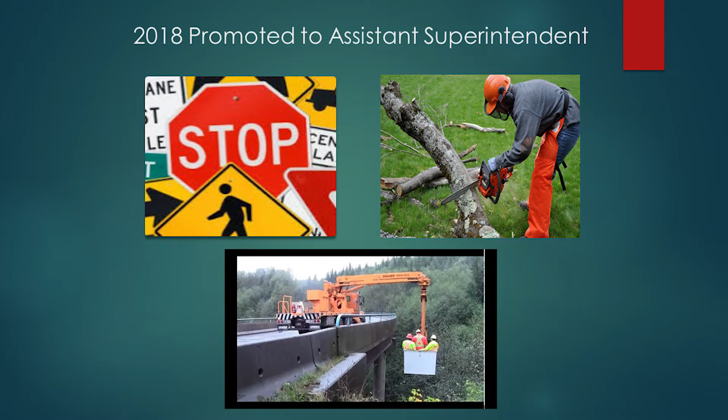We often talk about change, and sometimes when we talk about change, it really just boils down to, are you willing to take a chance? So for us and for our story, here's how this change/chance happened. In 2018, I was promoted to the assistant superintendent, and what that entailed for me is I received a sign crew, a brush crew, and a bridge crew. The sign and brush crew are tales for another time that I'll talk to you about later if you want to talk to me.

I come from a background of communications and theater, and believe you me, if you know me, you'll learn about my theater background a lot. My question was, I'm not an engineer, nor do I play one on TV. So I didn't really know anything about bridges. I was like, I don't know nothing about no stinking bridges.

Right? So my story started with, how do I learn about bridges? How do I learn about these assets that I have received? Well, I'm going to tell you that if you don't already know, you have these lovely partners with you, and they're called LTAP, those local technical assistance programs, and those people are wonderful. Our LTAP guy is actually here today.

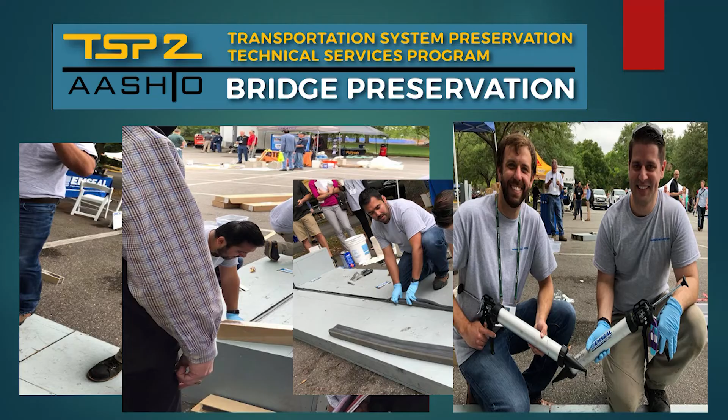He's going to moderate this next session, Pat Connor, and I think Greg had spoken about him a little bit as well. But I told Pat about my lovely dilemma, if you will, and he said, well Mel, I got a solution for you. Here's what we're going to do. He said, I'm going to take you, and how would you like to go to Florida? And I said, yes, please. So he took me down to Florida on a scholarship, which we have another local here that's on a scholarship as well.

So Pat is really willing to help us out, and he said, I'm going to take you to this program, and I'm going to let you learn about bridges, let you learn about some of those things. And the great thing about this is that you get to see it, touch it, feel it. And I'm one of those kind of people. I like to see it, touch it, and feel it.

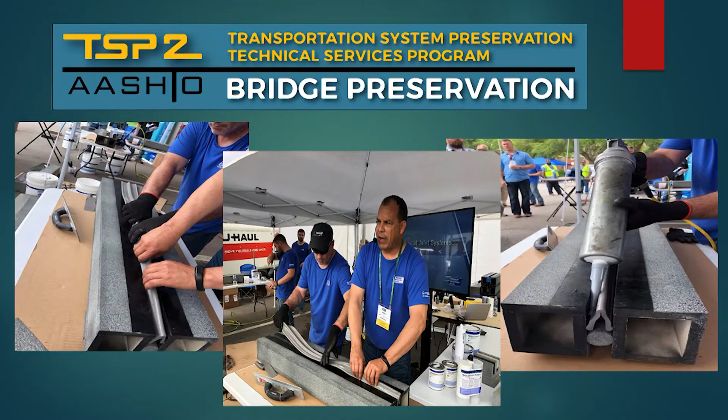So I got this great day on the second day, which was actually Tuesday at that time, and they take you out in the parking lot and they set up all of these demos, right? And they show you that, hey, this is this. And I loved that because I got to see and I got to touch and I got to feel.

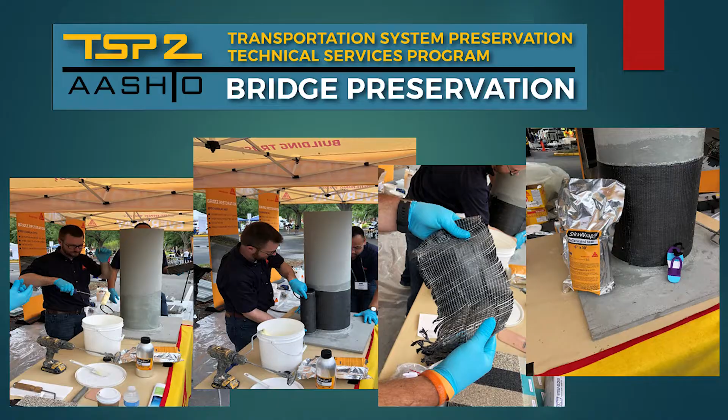Some things that honestly, as a local and as a person that doesn't come from that type of a background, I got some terminology under my belt. I got some things that I wouldn't have had otherwise.

People that drive on our roads, it's funny because we talked about this in one of the other presentations. They look at the aesthetics, right? They don't understand that there are things going on underneath those bridges, above those bridges, whether it's just a smooth or a bumpy ride.

So I was able to do that, and as you can see, these are just some of the slides, and I was just showing you some of the things that I actually got to see and experience and put my hands on during that time.

Another one of the things that I was learning, or the way that I was learning is, again, I think Greg had mentioned this too, is that we have a bridge conference. We've actually turned this down now into an asset conference.

I was able to go to Purdue University, and they have an S-BRITE Center with old bridges that have failed for one reason or another. You can go around and do a self-guided tour and learn about the reasons why those bridges have failed, or some of the things going on with them. Again, that was terminology for me, things I needed to learn.

At the beginning, that age-old question is, how do you begin? Well, that was really easy. Here's what I had to do. I had my boss, Kevin, who's a great engineer, and I said, hey Kevin, can we talk? And he said, sure.

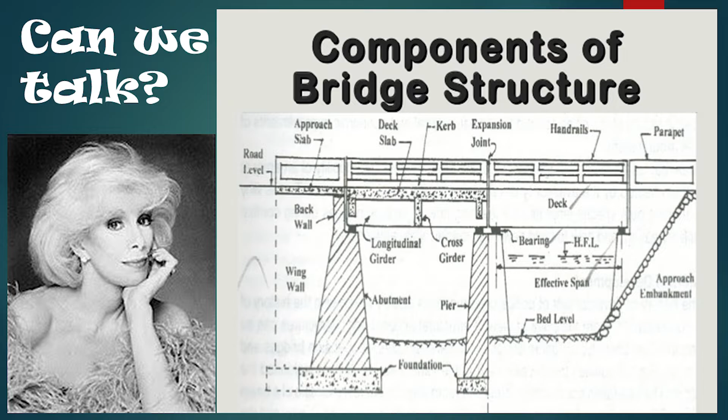I said, I'm not sure what I need to do. And he said, Mel, one of the things I think would be very helpful for you is to try to learn about some of the components of the bridge. What is an abutment? What is a pier? Now I know a lot of you are going, duh, but for those of us who have never done this for a living, these were terms that I needed to learn.

I'm teaching my guys now. I actually have 2 new bridge crew members - our old ones have went away, one retired and one had to leave for medical reasons. So I'm teaching these guys, and they come from a construction background, but these are elements they don't necessarily know about. So I had to go through that same process and learn those things.

Another tool for me that I wasn't using, that Kevin handed me, was our bridge inspection report - that huge big book that some of us get and blow the dust off of every now and then. We get those every 2 years. That's a wealth of knowledge. There's a lot you can learn in that draft copy of the bridge program.

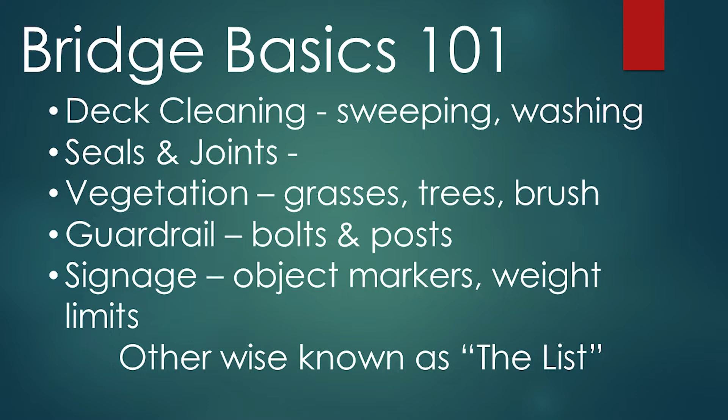So what I learned was some bridge basics - some of the things we weren't doing. We weren't deck cleaning. We weren't looking at our seals and our joints. We weren't looking at our vegetation, the guardrails, the signage, just load postings - we just talked about that. So all of that stuff, put together in that bridge book I was given, I came up with what I called the list.

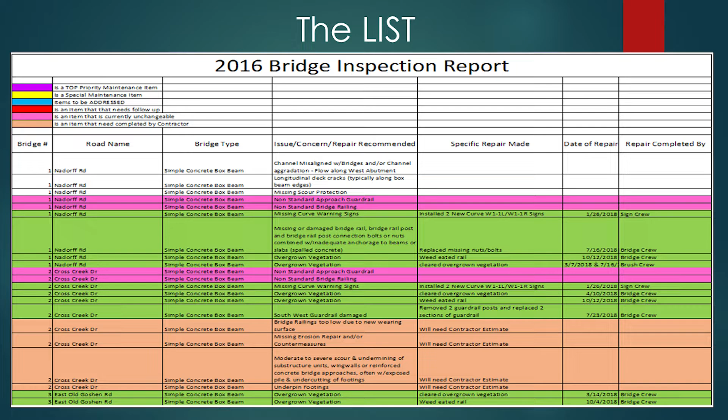The list for me was, believe it or not, like 263 items. I know a consultant could have done this for me, but I'm one of those that likes to check things off, I like to check the box off. So I made an Excel sheet and put 263 items on there.

Then I handed it to my bridge crew and said, here you go. And they said, well what do you want me to do with this? I said, you see these things that I think you might be able to handle? I want you to start handling them, and give me a date when you're handling them. So every week we'd have a meeting and talk about that. But what they would tell me is it's too big.

And I said, well, how do you eat an elephant? And they'd go, I know Mel, one bite at a time. That's right, that's how you eat an elephant, one bite at a time. And so that's what we would do - we took the bridge list and we broke it down one bite at a time.

Another resource - and what I'm doing is just using things that I had available to me - was my team. I love this quote: resources include your team, the team that you build, whether they be positive or negative. There's little difference in people, but that little difference makes a big difference. The little difference is attitude; the big difference is whether it is positive or negative. Greg talked about champions, and I think he talked about culture.

A lot of that is just about your attitude and about passion. We heard about passion earlier today, and you've got to be able to get out there and be willing to make that happen.

So I always talk about your team. You want to get people that are willing. And I know I'm old, believe it or not, but Mr. T is one of my favorites. He pities the fool who doesn't have A players, right? Because we've got to have a good team.

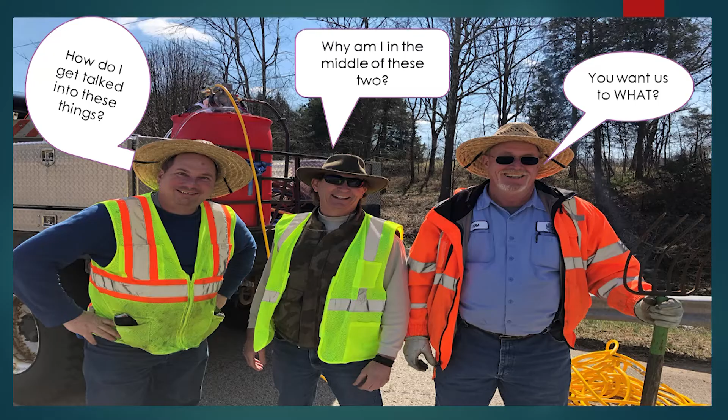Now speaking of teams, the reason I had Mr. T up there was because this is my team, and this is the old team. The gentleman in the middle we'll talk about a little bit later, but he is also a resource, or he can be used as a resource. These two guys—I do have permission to use this picture, by the way, because they're funny—but this is my team. So I have a big whopping team of two.

So how do you use two people when you're talking about assets that might take more than two people to do a project? Well, I think we've heard a little bit about that today. Sometimes you have to use contractors, sometimes you have to use other resources available. But what can that team of two do?

One of the things that we did was when I was asked to go, or was allowed to go, to Florida, and I said yes—this is where Tim comes in—I met Tim Woolery from Advanced Chemical. I was told by Pat that, Mel, one of the things you're going to do is have a demo with Tim, and he's going to bring out some product for you, and you're going to demo a bridge deck. And I was like, okay, what are we going to do with this? And he goes, well, you're going to seal the bridge.

So this is Tim, and this is the day we were out there, and this is what we were doing. We were demoing the bridge. I didn't know it at the time, but it was the start of our bridge sealing program.

So another tool in your toolbox that we don't often use—and these conferences are perfect for this—is your contractors and your vendors. Go out there and make friends. I think it was Chris that said try to talk to at least 10 people today, or make 10 new friends, because those people are willing to help you.

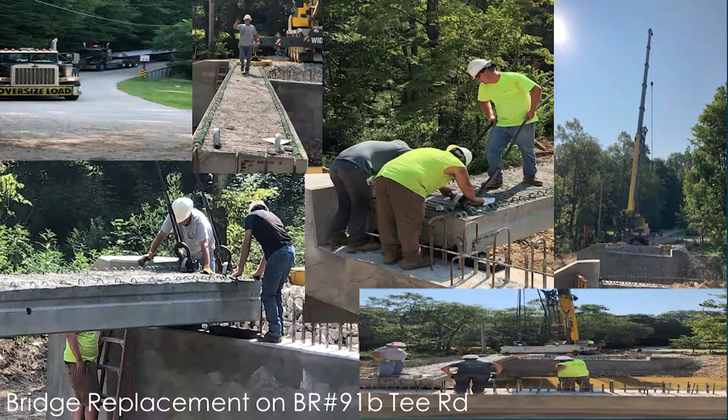This is just an example of one of the bridge replacements. This was another example of a tool that I used. We have contractors, local guys that do our work for us. So there's a bunch of pictures in here, but we went out there and just watched them place the beams, and that was a really big deal. I'd never seen beams being brought on a truck and placed with the crane. I know it sounds silly, but sometimes you don't know what you don't know, and until you experience that, you don't know how to actually deal or handle it.

Another thing we did was some deck patching. We had another local contractor, and he allowed us to come out and watch that whole process. As a matter of fact, he actually let me chain the deck—I'd never done that before. That's really cool. Has anybody chained a deck here before? To me it was like finding a stud in the wall. I thought that was so exciting because it makes a different noise—oh, there's a little D, and there's a D-lam, right? And he's like, yes, Mel, there's a D-lam.

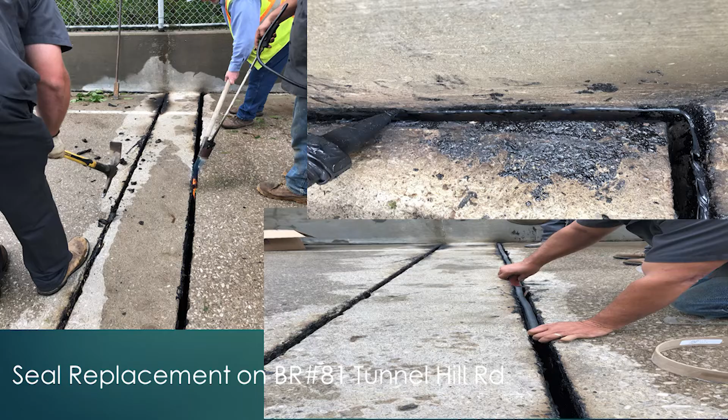Another thing that we did was we watched the seal replacement on one of our bridges.

So this is another process that local contractors were doing for us that I had never seen or experienced. But we took the time to make a connection with those people and ask if we could watch this process, and in that exchange they even allowed us to do some of the things.

My guys got in there. One of them was down there with the flamethrower, and he loved that. He wanted to heat up the tar and remove it, so he got to do that.

That was helpful because, again, can you do this with two people? A process like this took 10 guys out in the field doing this, not including your flaggers. So I thought this may not be possible for us to do. This is another thing: we did a full depth replacement.

That was another example. We're talking about preservation today, right? That's a big deal for us. One of the things we did in our training was have LTAP give the definition of preservation. I'm just going to read this, since we talked about what the definition was and agreed to hammer it out. For us, preservation is the act of keeping an object safe from injury, harm, or destruction.

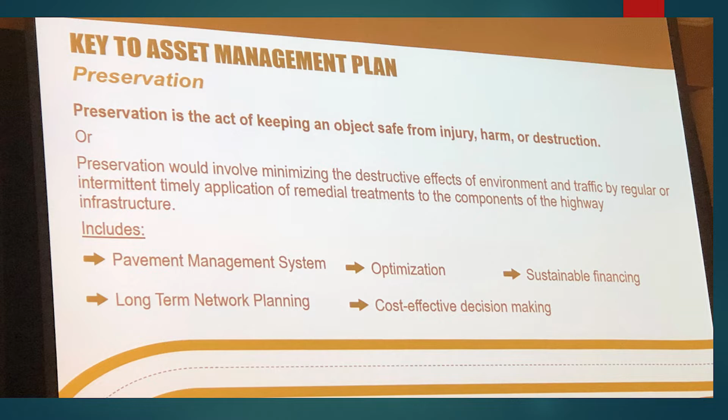Or preservation would involve minimizing the destructive effects of environment and traffic by regular or intermittent timely application of remedial treatment to the components of the highway infrastructure. That works perfectly for me with a bridge.

So then we talk about culture. Now we have to move from not only knowing what we're doing and getting our staff involved, but building a culture of preservation. We want to create that culture, right? We have to talk about it, champion it, and promote it. Culture eats strategy for breakfast all day long -- my boss loves that expression.

So where did we start with that? Our consultants are doing bridge inspections for us every two years, and that created that lovely list I started to check off. But I needed my guys to touch it, see it, feel it. So how do they do that? They have to take that book, or become willing to get in and get underneath and get around and get out.

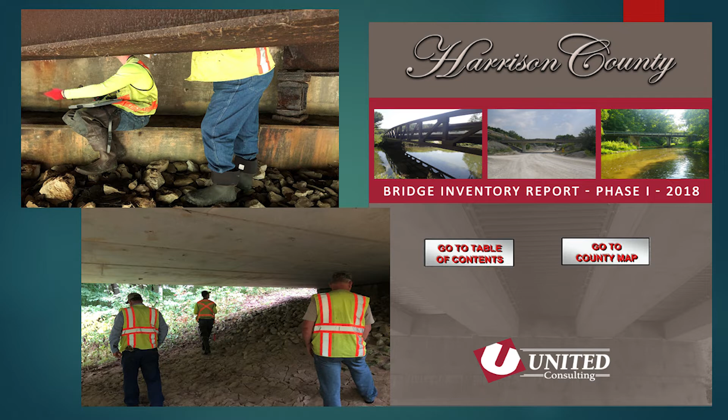So they did. Another tool we used was our consultants -- the gentleman sitting down on the beam underneath there is our consultant, and the other two below are my team at the time, just out there asking questions. Like I said today at lunch, I wanted to go out there and see what they were seeing, or ask them, when they're looking at something, why did you look at this?

Why was this an issue, why was this a problem -- not just because it had an obvious crack, or an obvious D-lam, or an obvious defect. What was it that was making you, as the bridge inspector, look at this? So we go out with our bridge inspectors every cycle. Our cycle's coming up this August, and we will be out with them.

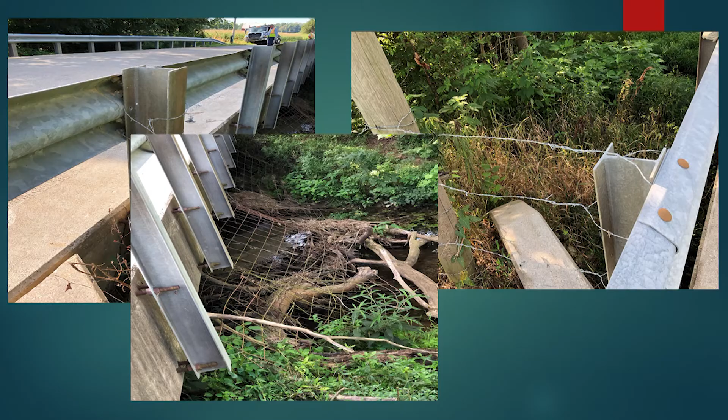This is just some of the examples we've seen in Indiana on some of our local bridges. We're very rural, we have a lot of farmers, and our farmers love to attach their barbed wire to our fences. They love to have cattle fencing so their animals don't get in trouble, but the problem is they attach that to the bottom of our bridges.

So we have to go out and have nice little conversations with them, or sometimes not so nice conversations, and say, look, you're destroying our bridge, our asset. Yes, it might be on your property, but you don't own the bridge. So we've had to do some of those things. Seeing holes, that's obvious -- a hole this big, and then a hole this big, right? And in two years, a hole this big can go to a hole this big.

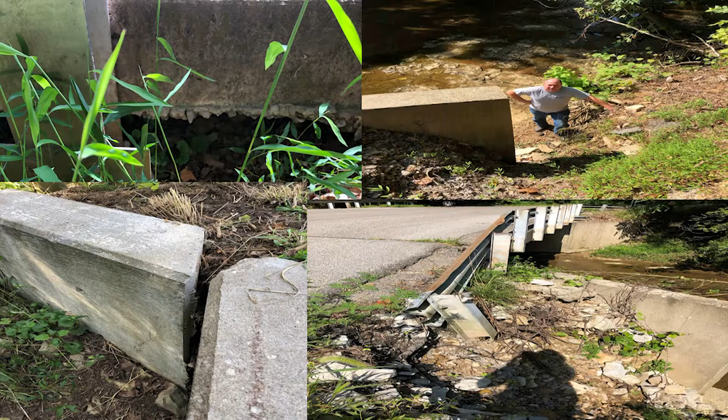So that's another reason why we wanted to go from just every 2 years to every year. This is some of our erosion issues that we noticed and some of the things we were doing in order to try to get that taken care of.

So we don't have a lot of scour problems, but we did have a lot of erosion. What my guys have done is, God love them, they were very, very good. Some of our equipment is not great, we have some minis and we don't have a lot of large equipment. We couldn't always put the equipment where it needed to be for actually putting riprap or helping with the erosion, so my guys would hand haul it. And that is a testament to the culture we've tried to build there.

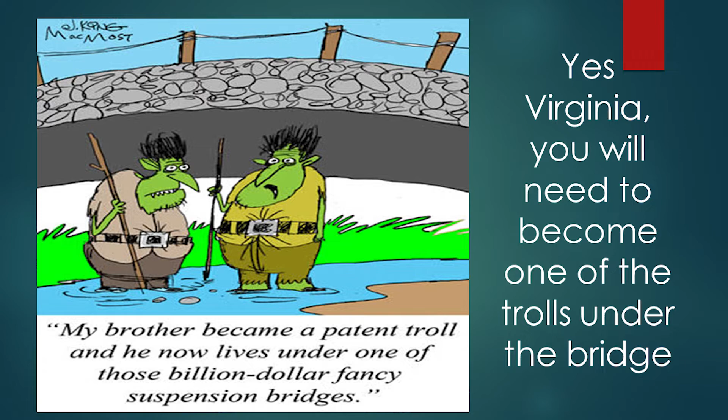So I would say, yes, you will need to become one of the trolls under the bridge, and my guys have embraced that fully. They are very good about the inspection process. If I have time, I'm going to show you one of the forms. I'm trying to go through this quickly so we get to where we need to be.

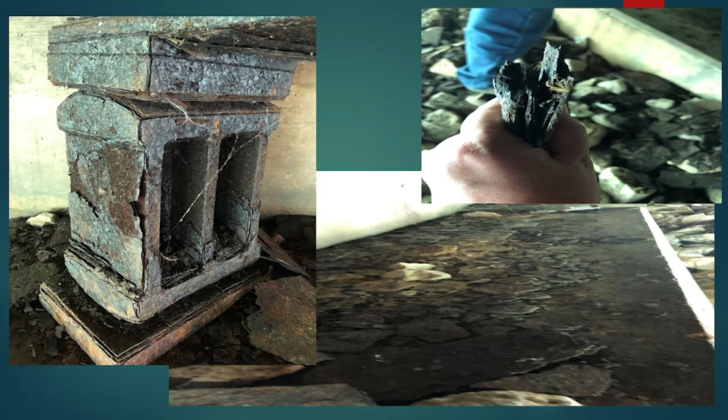Here's some of the other things we've noticed. Of course, here's a large crack, and there's some rebar showing through here. These are some of the things we were trying to look at and trying to fix, and become more cyclical, right? So starting that whole preservation culture.

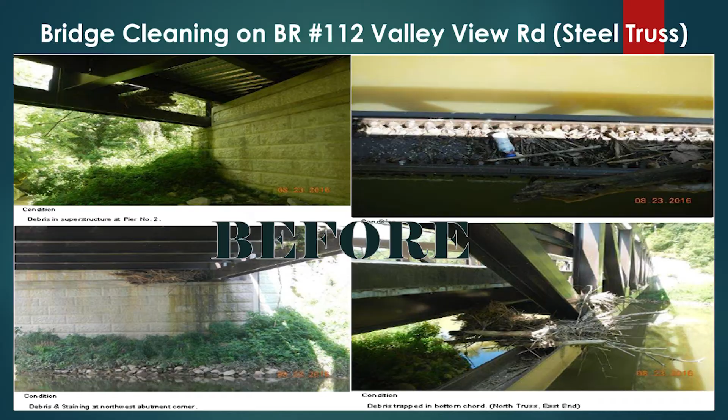This was before, so bridge cleaning. We did not wash our bridges, plain and simple, we didn't do it. When I had my first demonstration with Tim, one of the first things you have to do is wash your bridge deck. Wow, what a difference that makes. And I think someone said earlier, the more you wash them, the easier it gets. It's 100% true, right? This is one of our steel truss bridges.

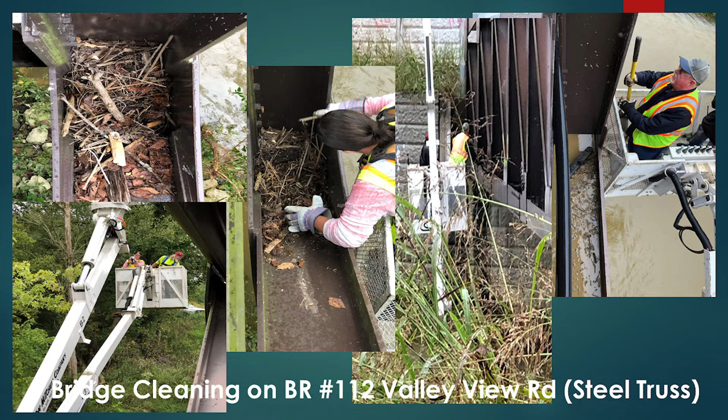I just love this bridge. We usually have a flood in April or May for whatever reason, and we wind up having some really heavy rains. For whatever reason, this time, I know this is too much information, but we actually had a deer carcass in here during this cleaning.

I did not remove that, I made the guys do that, I'm not going to lie. But that is me up there, I try to do what I ask them to do. I think that's a good philosophy. Don't be unwilling to do something yourself if you want to tell somebody else to do it, you better be willing to do it too.

So we went out and borrowed the snooper because we don't have one and don't have access to one. During our inspection period, and we write this in the contract now, we ask our consultant if for the day we can use the snooper. It takes us half a day, and they will give us a driver. We run the snooper ourselves, but we get in there and clean it. I can tell you, this is the first year we did this, and it took us every bit of that whole half a day.

We just did it in 2020, and it took us probably 2 hours. It was because there wasn't as much residue, there wasn't as much buildup. So again, if you're doing this all the time, that's the whole point of preservation. From 2018 until now, this is what we've learned and started to do. We're starting to do some sweeping and cleaning of our bridges, and because of the lovely deck sealing program we're on, we're doing that.

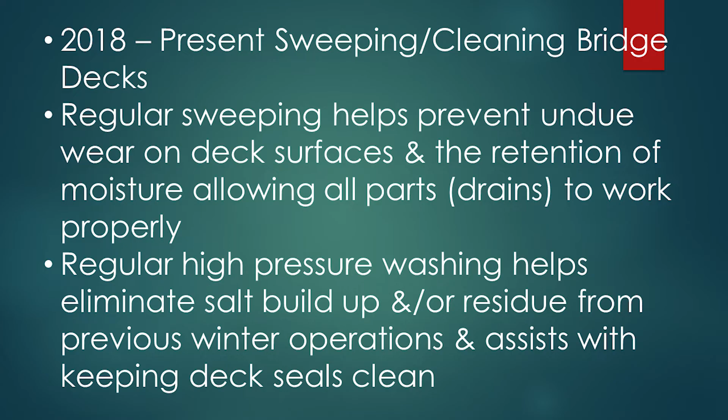We are actually washing all of ours, and I say all of ours, I only have 89 bridges, so I know a lot of you have more to handle than I do, but I also have just a team of 2. So we wash all of our bridges annually. Now, guardrail, this was one thing our guys weren't willing to tackle for whatever reason. There are limitations on what you can and cannot do.

There's some guardrail work that I won't allow them to touch, just because we want to make sure we're doing it in a proper way. But in replacements, we can do those sorts of things. We can take it where it's jointed and just replace that. So this is an example of that.

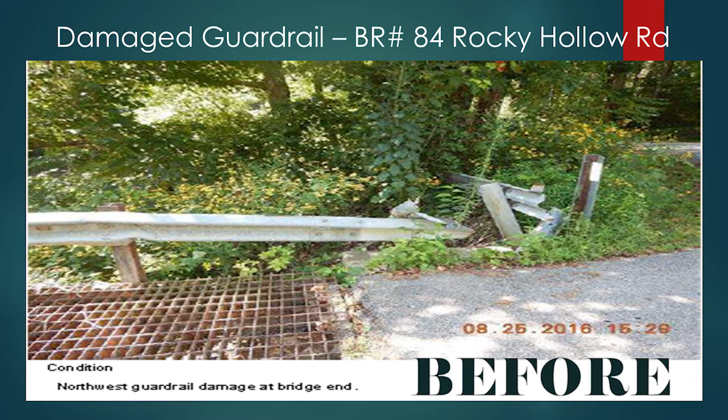So this was the before, this is the after. One of the things this did for our guys was give them a sense of accomplishment, allowing them to go out there and actually do something, and as someone said earlier, to own it. So now they'll come to me and say, hey, this piece of guardrail is bent or broken, and I'll say, okay, can we fix it? If they think we can, we'll attempt it, and if not, we'll get a vendor involved.

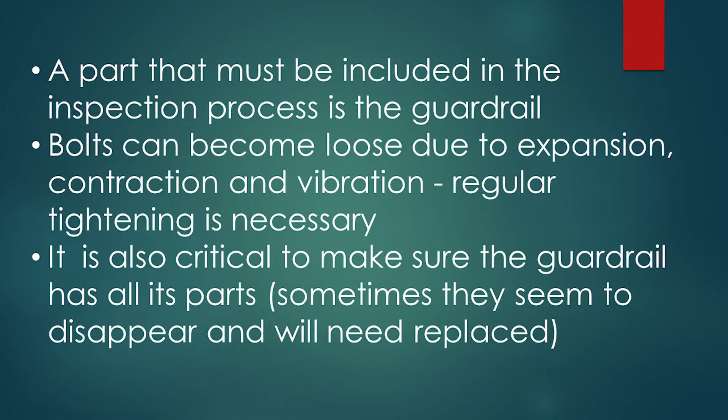This is something we had to include in our inspection process. We had to look at the nuts and bolts. I don't know why, but in southern Indiana the bolts and nuts would mysteriously disappear. So we had to make sure they weren't just tightened, but that they were all there. We do that on an annual basis. I know that sounds weird, but that's what we do.

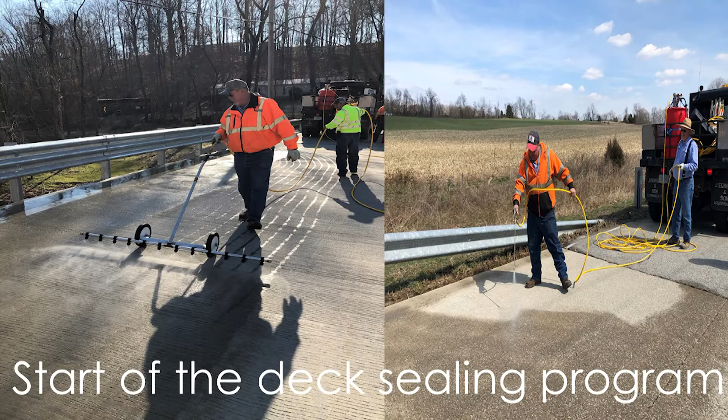Deck sealing - we are now on our 3rd year of sealing, and this year will be our 4th year of sealing bridge decks. That's all because of Tim and his company and his willingness to come out there and demo silane, show us how to do it and what to do, and that it was cost effective for us so that as a local, we could afford it.

This is just an example, and again, I'm out there doing it. Our guys are even doing the wing walls. Anything they think they can spray, they're spraying now. So we love it. This was the start of the program.

I think we picked the coldest day in southern Indiana to go out and demo. We asked some of our friends and neighbors to come out and watch the process with us and to meet Tim and talk to him. So we do this now regularly.

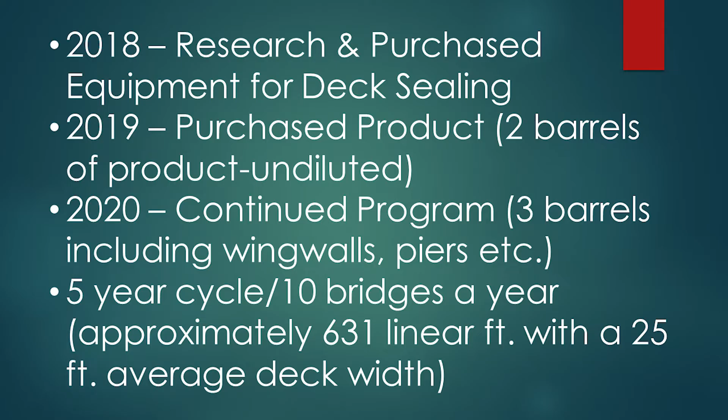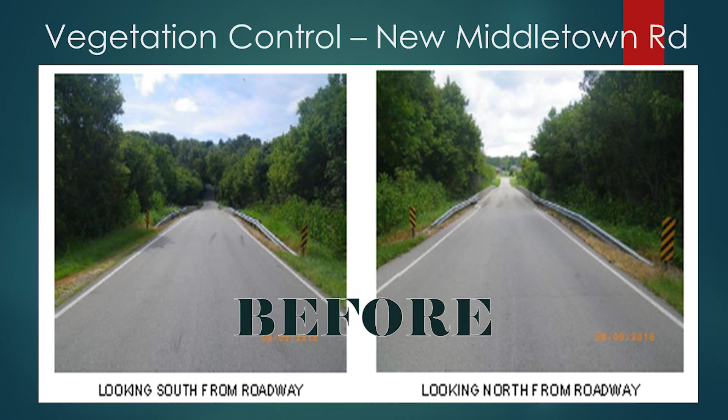Vegetation control - I know people don't think about this, but it's not easy being green, and it's not easy being brown either. A lot of times vegetation is something that can harm, not help, the life of our bridges. So I told the guys, hey, you get a new present - you get a weed eater for Christmas.

They took those weed eaters, and we're also in the process of getting our herbicide and pesticide license - it's actually for being able to handle chemicals. We're going through that process as a municipality so we can become agents and have our actual crews use that stuff on a regular basis. That's what preservation is - doing something on a regular basis, not just once in a while when you get your hand slapped for it.

Here's another thing we did - canopy. Canopy was a big deal. We have a lot of hills and valleys, and our topography is beautiful to look at, but the leaves and all that good stuff cause issues. As a matter of fact, this is one of my favorite pictures.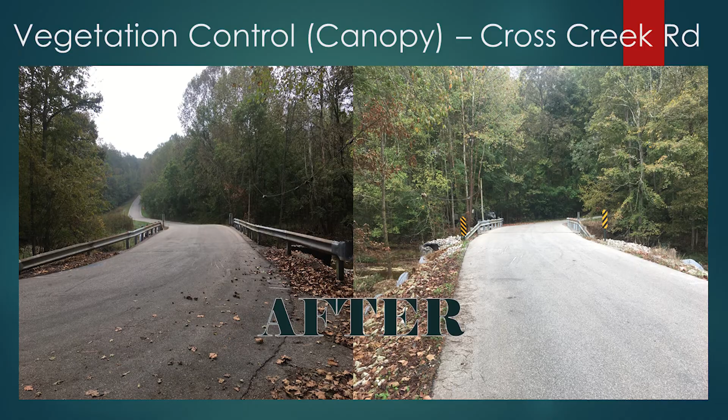We've noticed that these little things, these are little things, we're not talking about replacing a bridge. These are little things that any agency with one person can do. If you have a one-man crew, they can do this. We've worked with our bridge, our brush, and our sign crew, and that's the herbicide program I was telling you about. We're actually doing that on a larger scale, trying to get the pesticide certification.

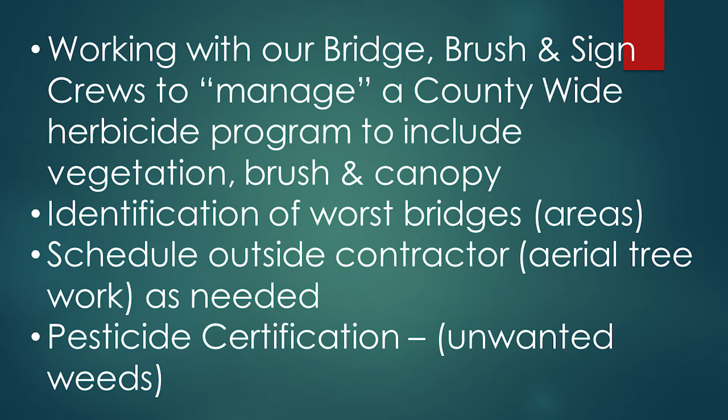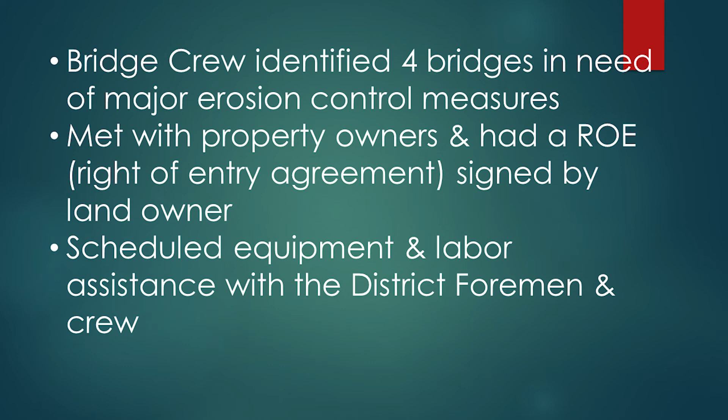So erosion control, here's another thing we were doing. These are a lot of pictures jumbled up, but let me tell you what we just did. Our bridge crew identified 4 bridges in need of major erosion control. We met with property owners and got what's called a ROE or right of entry, basically a one-page document. We meet with the owner and ask if we have the ability to get on their property for whatever reason. We're going to do this, this, and this, and we'll make sure that whatever we damage, we put back or replace better than it was. We scheduled the equipment and the labor, and worked with our district foremen, and we were able to do that. It worked out really nice.

So what do we see in our future as far as Harrison County? And for any of you, what should you see in your future? Well, you should see bridges. What I mean is that you need to be seeing your bridges. We talk a lot here about proactive versus reactive, right?

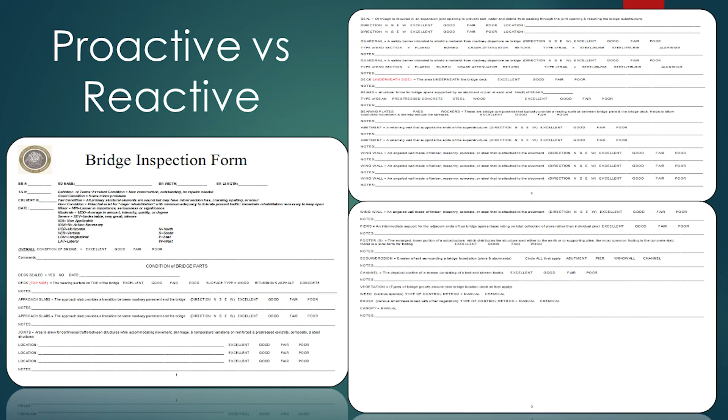One of the other things I did, and I know my consultant could have done this for me, but it just helps us put our hands on it, we created a local living, breathing bridge inspection form. We kind of took it off of the PASER rating, so we do excellent, good, fair, poor as our system.

I have the guys go out every year. They look at every asset that we have, our bridges, and then they rate them. They rate the specific elements: they rate the deck, they rate the underneath, they look at the scour if there's any scour, they look at the piers, they look at the abutments, they look at the wings, they look at the joints. They look at those things and rate them.

Then they come back with me. We have a meeting, and they'll tell me, I think this is bad, I think this is bad, and I think this is bad on this. Then I take it to my engineer because I ask him what our priority is on that. So we're still doing that.

One of our contractors, Jacobi, Toombs and Lanz, saw me do this presentation and asked to have a meeting with me. It really makes me happy to hear people talk about the element, because they wanted us to take it more to the elemental type of inspection. They told me it was really easy for me to do that, and they're going to help assist me. So that's just one more step we're going to take a little further. Very excited about that. These are some of the projects we did.

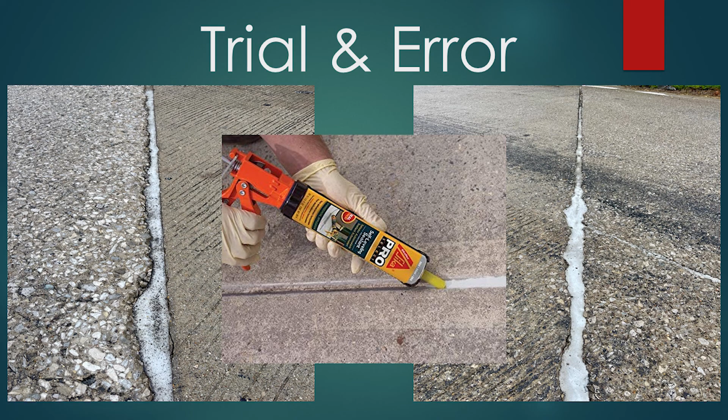Really what I learned was trial and error. I had to try things - some things worked, some didn't. I think that with any preservation program, through some of these talks today, people have said what has worked and what hasn't worked. You have to find what works for your county, for your state, for your agency, and go from there.

So with that, I'm going to leave you so we can get on a break, right? Thank you so much for your time.